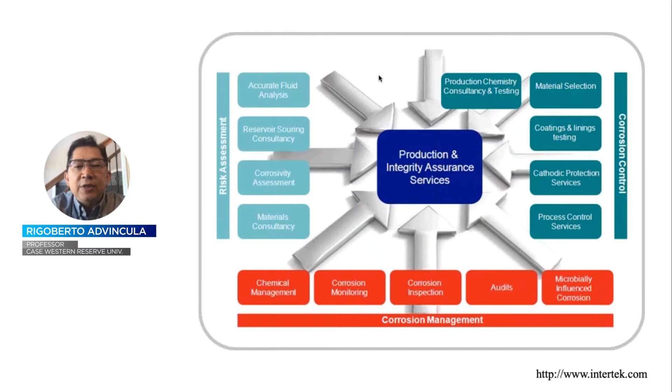Coatings go from industrial to automotive to part of the architectural coating industry, as well as different types of asset integrity management. So this is a good catch-all, which says that corrosion, for example, one of the biggest problems in any economy or industry, has to be mitigated by a number of channels, from effective management to different types of monitoring to different types of services. But more importantly, a coating scheme, technology, or project has to be part of that initial CapEx and OpEx—that means capital expenditure and operational expenditure of any industry that has to protect its assets.

Let me show you that the problem lies in environmental exposure of a lot of things, starting with carbon steel or any steel that corrodes, where you have problems either from the environment, from the fluid that's part of the process industry, or removal of waste, specifically in the oil and gas or even geothermal industry. The problem is you have to balance between the cost of capital expenditure and operational expenditure, which is part of the ownership proposition value.

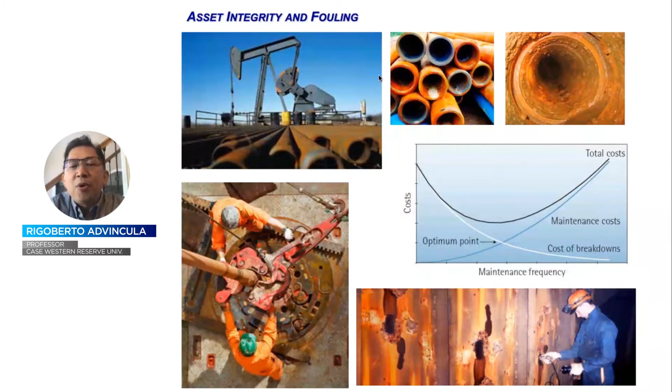So what happens is that if you try to overprotect at the beginning, if you try to use the best materials, the idea is that you will then have, not maintenance-free, but less maintenance of that asset. On the other hand, if you use cheap materials, standard or even below-standard materials, or any type of material that does not fit the environment of operation internally and externally, you will end up spending more for maintenance and replacement. So there's an optimum point that you need to balance these two needs.

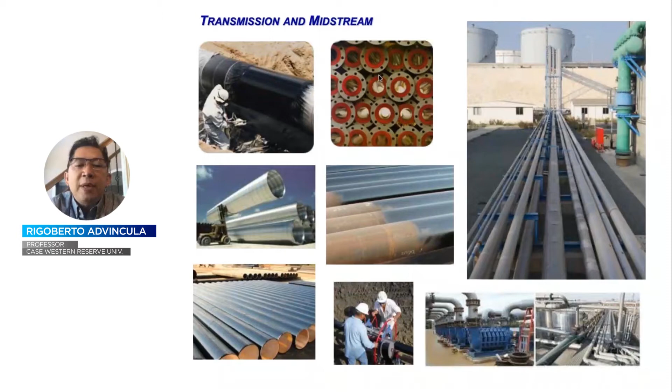For example, in the oil and gas industry, there's a lot of transport and transmission going on. We're talking about gas, distillates, or oil that has to be transported from one side to the other—for example, from the upstream production site all the way to the refinery. We are talking here about thousands and thousands of miles of pipes that are buried underground. Carbon steel, which we will review later, is of course the dominant transmission mode, and this is being replaced these days by non-metallic systems such as HDPE, or high-density polyethylene.

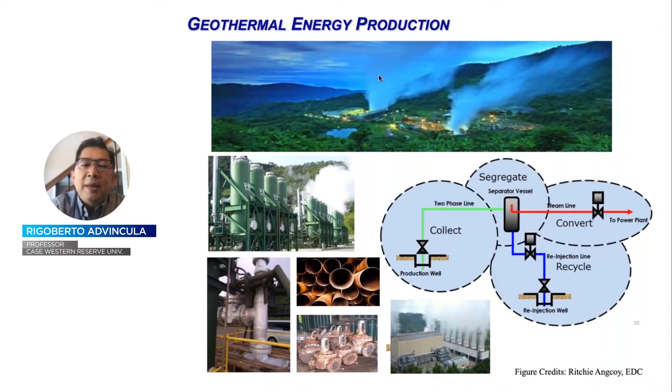Another industry with very challenging needs is geothermal energy. You have high temperature, corrosive environments, and while not so much high pressure, pressure still plays an important role in the presence of scaling and corrosion. These assets need to be protected, since they degrade much faster due to the Arrhenius law with regards to corrosion, the mineralogy, and high brine conditions, not to mention steam or high temperature two-phase fluids. So protecting them, whether using the best alloys or different types of coating methods, has to be part of the project and operation.

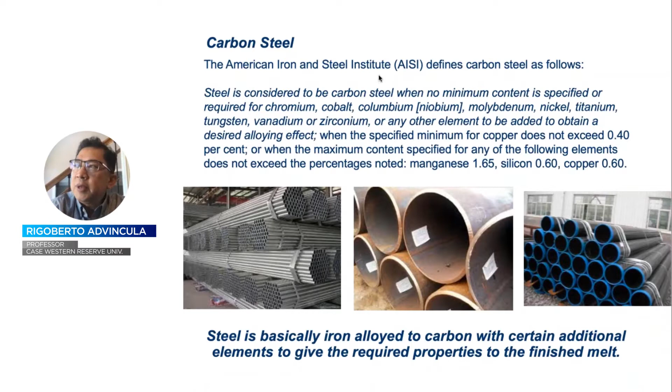I promised an overview of carbon steel. Carbon steel doesn't mean carbon is the highest content—steel is iron alloy as well, but it also has several metallic ingredients like chromium, cobalt, and molybdenum, which are alloys that give a certain amount of protection. So what is the carbon content when we say carbon steel? It has to have a minimum amount, which improves not only corrosion resistance but also some of the mechanical properties of the steel itself. Carbon is thus a very important designation and part of what we call steel pipes or the steel industry. I won't explain all the different types of steels, except that one sometimes hears about corrosion-resistant alloys.

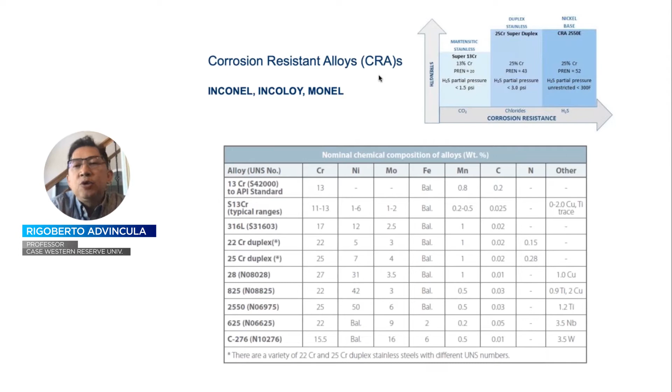Inconel, Incoloy, Monel—these are some industry trade names you may be familiar with. These alloys, super duplex, etc., need to have an amount of chromium and nickel at a specific percentage that allows them to withstand several types of corrosion, from what we call sweet and sour corrosion, meaning a differentiation between the effect of carbon dioxide, sulfur, H2S gas, etc., on the ability of these alloys to withstand corrosion. Again, this isn't a talk about alloys or different types of super strength, highly resistant, even titanium alloys—that could be another talk for today.

By the way, there's a good approximation that 5% of a country's GDP is actually spent addressing corrosion for the whole country. That means in the US alone, we're talking about hundreds of billions of dollars of resources spent towards preventing corrosion.

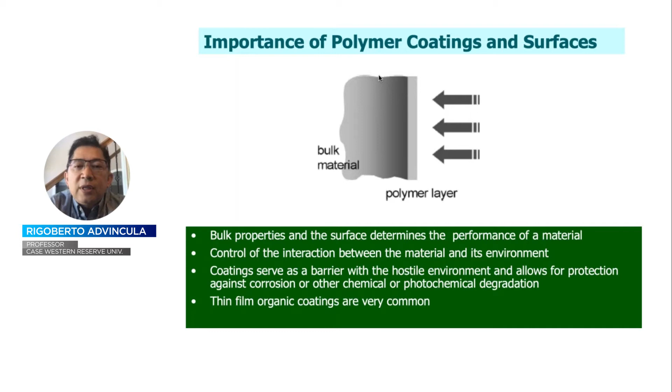So what is the importance of coatings? The best way to view it is that it's not a one-way proposition, or a coating that only responds to the environment. In many ways, a coating is controlled through diffusion, barrier properties, even smart properties that mitigate corrosion. But remember, the coating also has to adhere to the surface and also has the effect of containing or packaging what's on the other side of the coating.

So when I say coatings, I might as well be talking about automotive coatings, packaging, different types of consumer care products, or even your iPhone, because the presence of coatings enhances the lifetime or product shelf life of any consumer product, but also helps preserve assets, as I mentioned earlier, or can have implications in the healthcare industry.

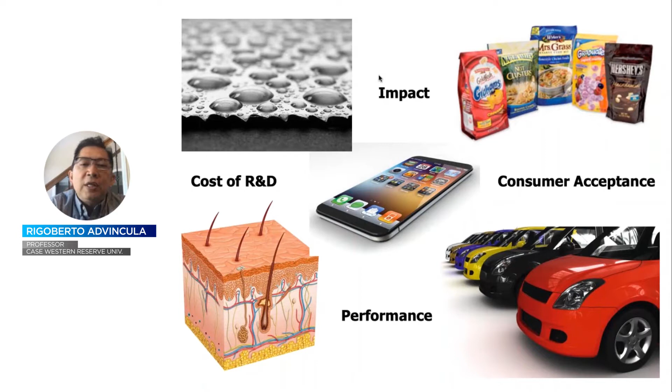In my work as a professor, we have also worked on a number of what we call ultra thin film coatings—nano structured layers or coatings that can be controlled to less than a nanometer in thickness. This can be done by chemical adsorption, physical adsorption, which divide into different types of coatings by layering, grafting of polymer brushes through chemical and polymer modification, or the adsorption of electrolytes, electrodeposition, and so on.

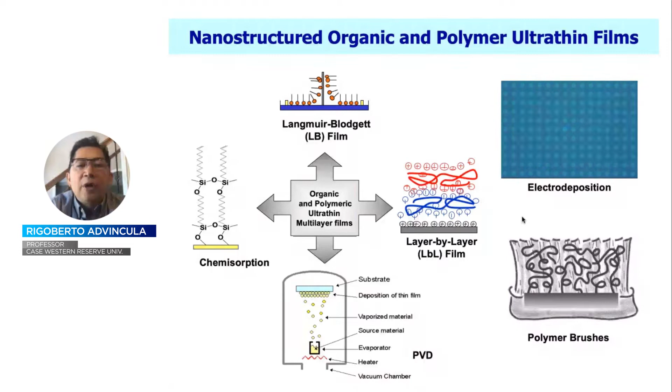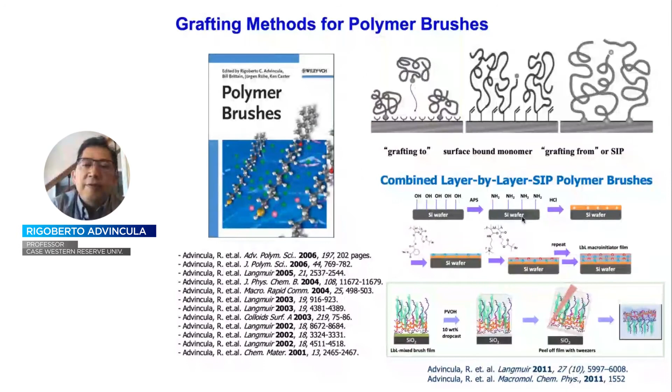In fact, we specialize in a technique called polymer grafting or polymer brushes, where we combine the chemistry of doing polymerization on surfaces, whether it's carbon steel, plastics, or silicon wafer, with the ability to control the brush density of those grafted polymers, which can have many advantages in terms of the ability to control diffusion and corrosion.

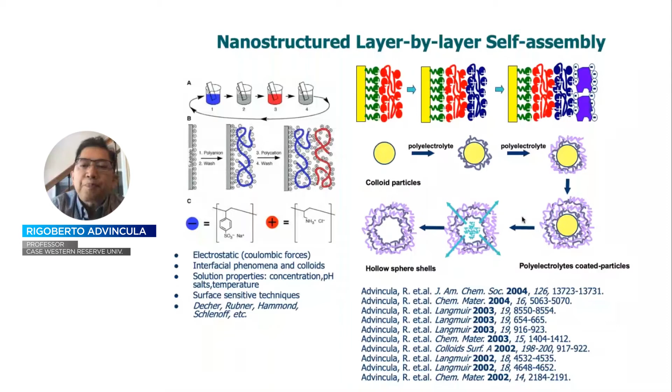Another technique that we work on in layer by layer control is the use of polyelectrolytes and different types of adsorbing species that can be nanostructured in terms of thickness, ability to diffuse or create barrier properties, as well as improvement of specific sensory response.

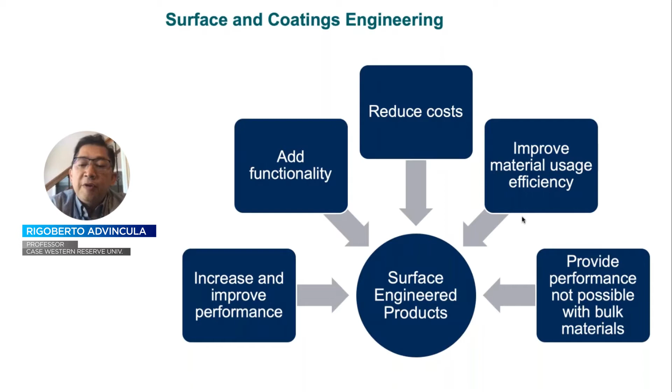So what is surface and coating engineering? Let me look at it from the point of protection. First of all, a surface engineered product is meant to improve, protect, increase performance, or reduce cost. For example, many paint companies or suppliers of protective coatings have to start from a value proposition that improves over existing products or creates new functionality. So any surface engineering project has to have a good groundwork in science and engineering knowledge, on the action of individual contents on the formulation, the ability to withstand extreme environments, or simply a durability that combines with the cost of the product itself.

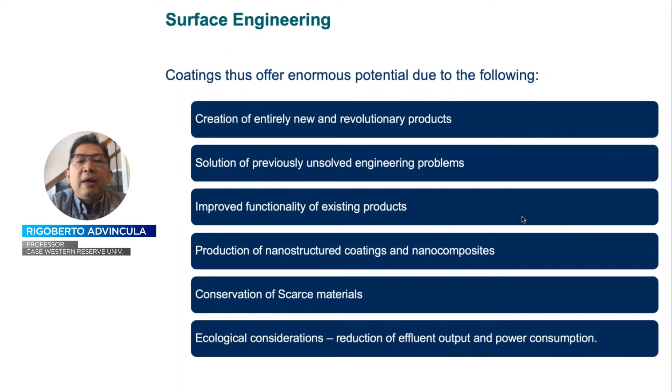So actually, many types of materials or products are basically conversion industries. That is, you take raw materials and try to improve on an existing application by combining these raw materials to have a synergistic combination or action that improves that performance.

So let me preface this by differentiating the different coatings available. When we talk about do-it-yourself paint, a $30 to $50 can you can buy from Home Depot or use in a lot of building construction, these are architectural coatings, dominated by latex paint these days, but also epoxy, polyurethane, and others. This is something easy to apply, but with less function in terms of protection.

On the other hand, industrial and light industrial coating could be self-priming epoxy or polyurethane, has a better protective ability, and at the same time can be used in bigger projects such as industrial structures, bridges, buildings, warehouses, etc.

Finishing coating has a durability of its own, but also has an aesthetic finish, and is used mostly in finishing appliances, automotive, etc. Specialty purpose coatings are based on specific function and performance.

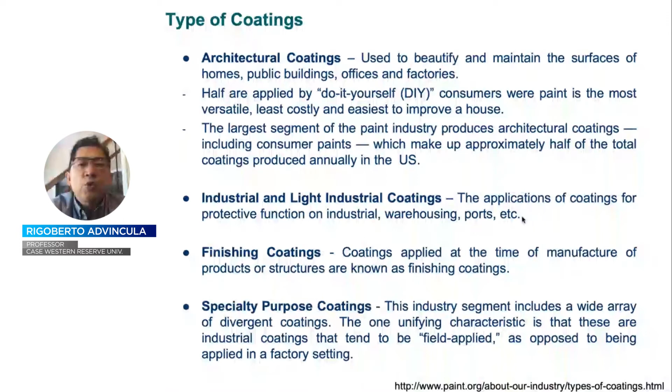Typically, these are coatings that can go into high stress environments, protecting process industries, or used for the military and Department of Defense. Special purpose coatings have high performance, sometimes less maintenance, and can be used for environments that encounter biofouling like marine, etc.

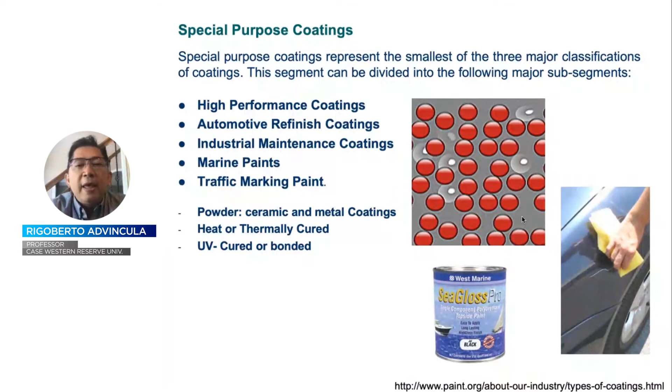And we are not just talking here about organic or polymer coatings. We could be talking about ceramic, metal coatings, hybrid coatings, or plasma deposited coatings, etc. In other words, this can be quite expensive as coatings, yet they do the job, and they're meant to be an investment in terms of performance.

For example, other types of coatings that we've worked on that might be of interest either for protective coatings or consumer products is the type of ultra thin and what I call unconventional coating. A lot of this has been making way towards improving other types of formulation. A good example would be coatings on your smartphone.

So each one of us has a smartphone. If you ever wondered why you have smartphones that last, or are smudge free, or of high performance, these are very, very thin coatings, typically by a curing method or plasma deposited method, meant to combine transparency, electromagnetic shielding, for example, and the ability to not retain or even oxidize sweat or typical organic waste or dust.

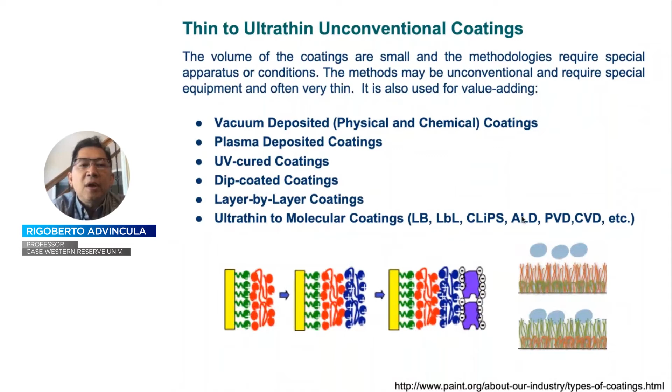So I'm not going to go in this direction for today. I could give a very specific talk on unconventional coatings, but I'd like to focus more on industrial coatings and protective coatings that are used in a lot of asset preservation, asset integrity, and process industry.

So what is a basic coating procedure? Well, you have to start with the coating composition, or maybe even synthesize all the way back to that monomer or polymer that will give a better performance over existing series or family of binder materials.

And then you need to consider the transport mode, meaning how do you take the paint from a can and deliver it to a wall? Well, you have to use a brush or a roller - that's a simple transport mode. Or if you cannot, you can use a spray method, or sometimes some specialty coatings use a high vacuum.

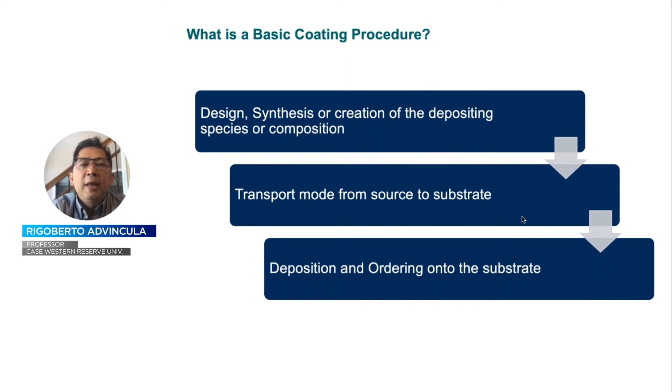And then a substrate by which you need to deposit or order this film or control its thickness. We're talking here earlier about carbon steel, but we might as well be talking about plastic or 3D printed parts or different types of surfaces that need good adhesion. So this is your basic coating procedure consideration.

Once you have that coating technology, a majority of the coating methods out there is actually delivered as a liquid material, whether it's a liquid droplet or a paint can. That means viscosity, or here I will use the term rheology, the science of flow, needs to be considered. There are many things to consider in terms of the ability to retain that viscosity over time or various surfaces, or the curing behavior.

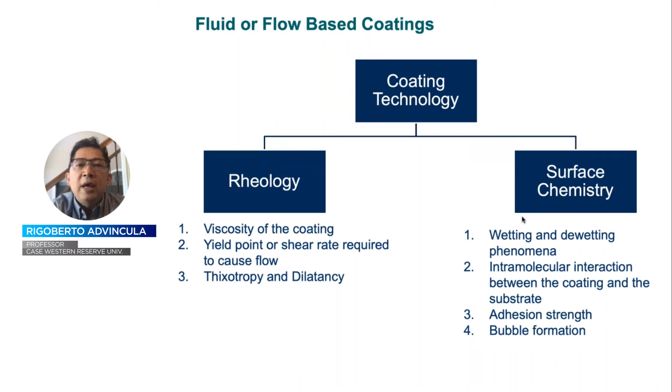On the other hand, the surface of the substrate itself needs to be considered. Is this a surface that can be wet or de-wetted, has de-wetting problems? Can you achieve chemical or physical adhesion? Or you can mitigate things that prevented you from getting a good aesthetic or architectural finish.

So as you can see here, the delivery of a liquid material as a coating has a time limit. Over time, as the coating material dries or the solvent evaporates or you have a curing behavior, the viscosity increases. That means you only have a limited window between your application to work out a good spread or finish.

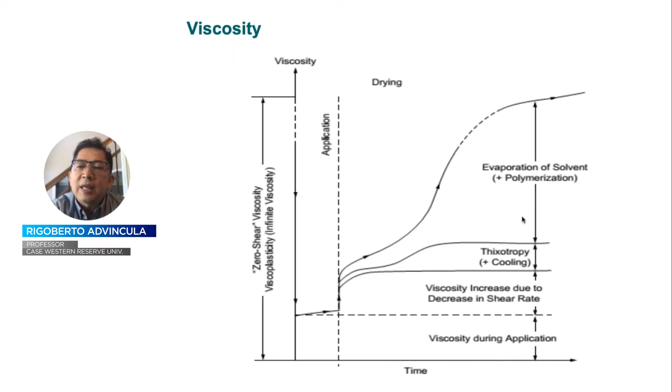This is something that's more practical and is actually quite an important undertaking in product development, because if you have poor viscoelastic control, it can have problems in the field, or you can have problems, or simply products that cannot be accepted by the market.

Anyway, this viscosity or rheological condition actually has many types of consideration when it comes to the surface. Do the binder particles or droplets coalesce over time? Do we get good wetting behavior on the surface? Is this a self-leveling material? Are there any considerations in terms of edge effects, depression, or sagging behavior?

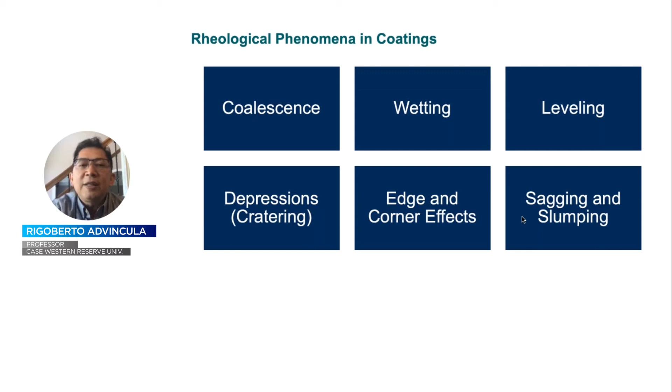So this might sound very practical in industrial terms, yet I guarantee you, if you go to Home Depot, as much as I do, and I have to fix things, I am very particular with the performance of coating products. You can actually be assured that even before it reaches Home Depot, a lot of science and engineering has gone on. So for those of you who like to do it yourself or DIY your projects, these are things to consider when getting the best paint versus cheap paint.

So let me use the rest of our time now to look at the major protective paints and coating materials. So I started by mentioning

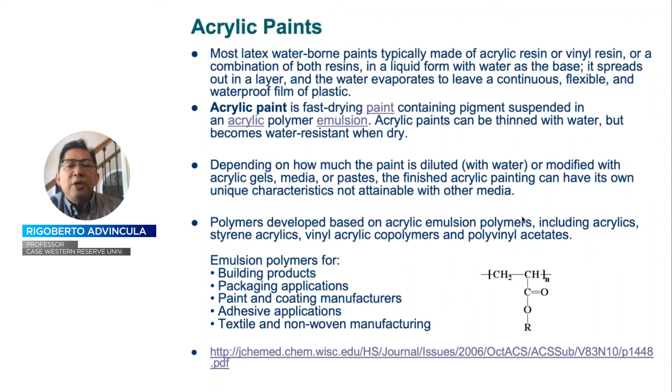architectural paints, where a majority of the architectural paints are sometimes called acrylic paints or latex waterborne paints. It's because the latex particles, which are classified as your binder materials, are made from a type of polymerization called emulsion polymerization. The monomers used are based on acrylates or methacrylates, meaning polymethyl methacrylate, butyl acrylate, or styrene, etc., that are produced by emulsion polymerization forming what we call latex particles. Here is just a picture of some of the monomers that could have gone into this binder material. A lot of these days, acrylate dispersions are combined with different types of formulated chemistries that can harbor epoxy, polyurethane, and other types of curing behavior.

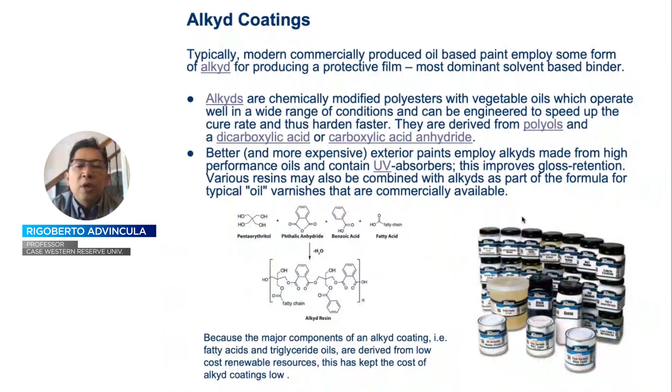Now, in the past, we heard about alkyd coatings. For the most part, this even goes all the way to ancient history. These are paints based on oils or various types of performance oil or finishing for wood, etc. An alkyd resin essentially involves a curing chemistry that is sometimes confused with varnishing, which is a good art practice or type of finishing for hundreds of years. But at any rate, these types of materials are typically solvent-borne, meaning they involve the use of organic solvents to deliver and give the coating consistency.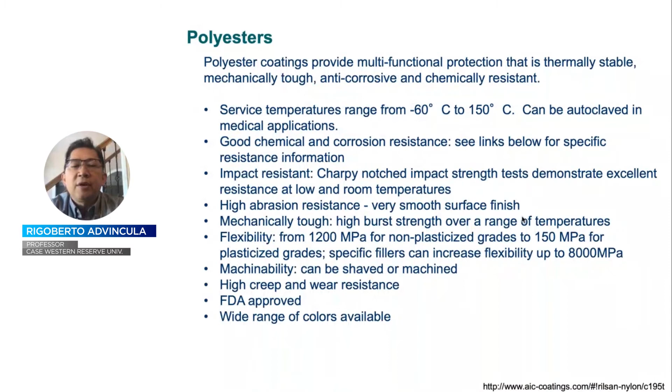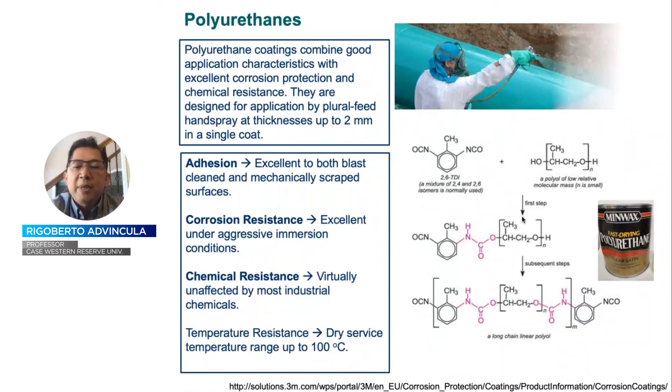Polyurethanes probably is more familiar to some of you who deal with industrial coatings or protective coatings that deliver higher performance. Polyester, for example, you normally encounter in automotive finishings or even can coatings. Polyurethane, on the other hand, is excellent for industrial grade performance, usually bound by either a cross-linking curing mechanism, or polyurethane particles or parts of the dispersion combined with other chemistry. So polyurethane is a very popular material as well.

Something that combines protective properties as well as cost in a lot of applications involving carbon steel protection is epoxy. Epoxy is found in a lot of adhesive materials as well. But when we say coatings and adhesives, the chemistry is not far from each other.

Epoxy involves the oxirane or epoxy group, typically synthesized by reacting bisphenol A and epichlorohydrin. Once you have the epoxy group, this can be cross-linked with, let's say, diamine or what we call co-reactant or hardener, giving you a very good thermoset coating based on a cross-linking mechanism. There are many types of epoxy variants with different hardening materials. The bottom line is epoxy not only belongs to a large family of coatings, but is also very popular in the carbon composite or fiber composite industries.

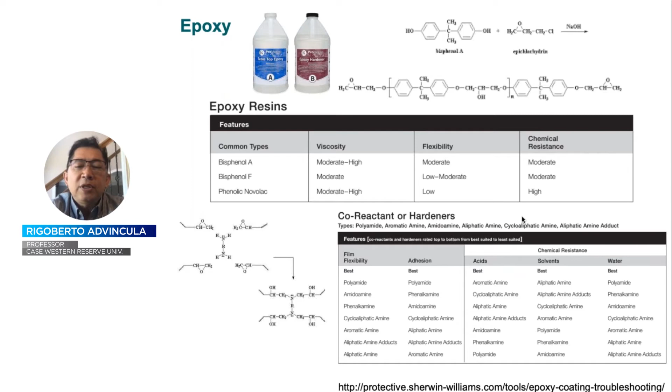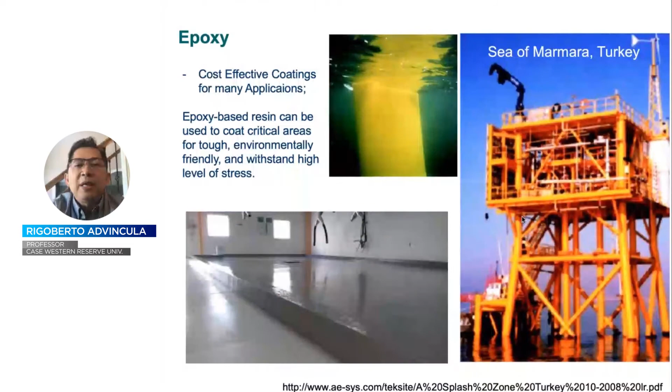So if one were to choose right now a coating material with good performance, cost, and overall acceptance to the market, epoxy dominates most of this. For example, if you just paint your garage, typically that could be a self-prime epoxy coating, or it's used in a lot of marine environments, especially for oil and gas assets. Epoxy does the job very well.

Silicone, elastomeric coatings, and adhesives are very well known for durability, for non-wetting, and for good chemical resistance. The coatings based on silicone are typically elastomeric, meaning you can rely on them even at sub-zero service temperatures, for example.

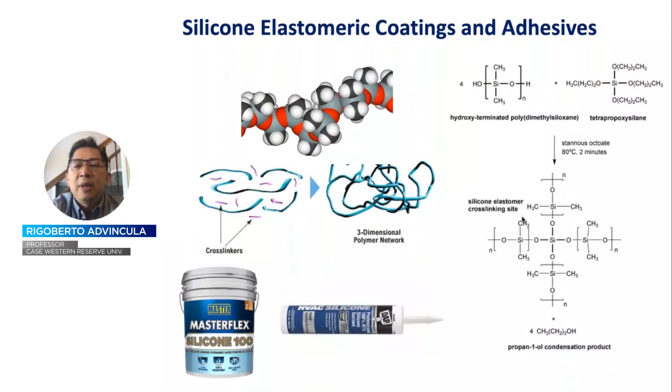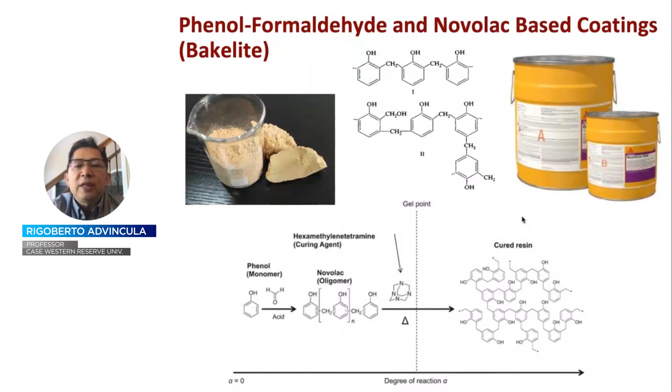Phenol formaldehyde and Novolac-based resins, probably together with epoxy, constitute some of the more cost-effective methods as well, and this is very old chemistry. In fact, if you've heard of the term bakelite, this is basically phenol formaldehyde chemistry that results in very durable thermoset materials or conditions for coating.

But really, you cannot exhaust the list available in the market. Epoxy, phenolic, phenol formaldehyde, polyurethane, hybrid coatings, ceramic-containing epoxy, inorganic zinc, Teflon coatings or different types of dispersions of Teflon, copolymers of fluorine, and highly protective coatings based on high performance polymers like PPS, etc. All of this constitutes some of what we know as protective coatings based on polymer and hybrid dispersion.

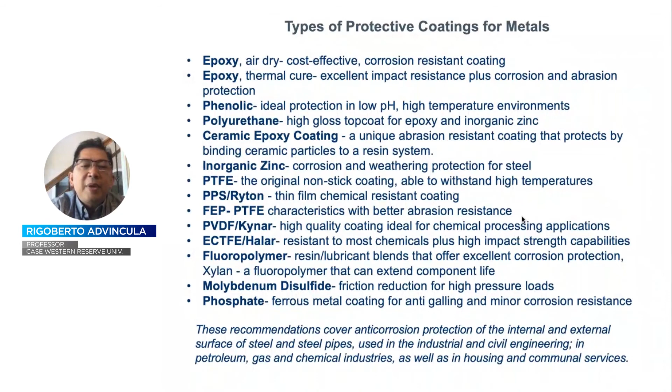Now, of course, we will not go into detail at this point on metal coatings or galvanization. I'll mention them briefly, but if we do not mention them as part of the protective coating selection, we will be amiss. For example, the use of high-performance alloys, or plasma arc weld deposited materials or metals, or arc plasma spray—these are different methods of delivering metal materials as coating.

Here you can see different types of coatings that are applied in the field. You can classify the application of coatings as external, internal, or factory versus field. A lot of them can be used for repair, mitigation, or as part of typical fabric maintenance on surface assets. But in general, one has to deal with protection in a changing environment, or a specific application beyond that of the factory-installed coating.

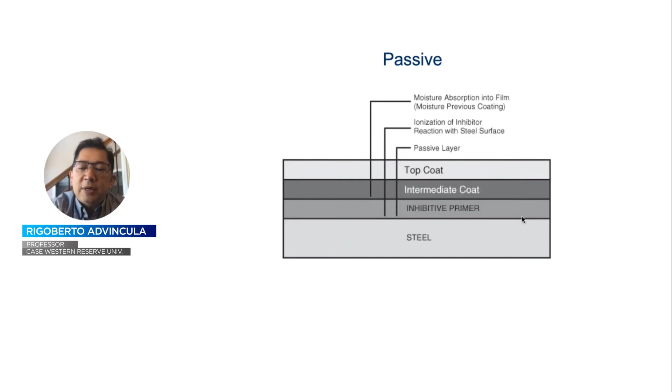So here, if we classify what would be considered a passive coating, first we can classify them as substrate, and on top of the substrate you put a primer for good adhesion of the intermediate or protective coating, and then finally a top coat that provides an extra barrier or finish. So passive can be what you'd call a three-layer material as well.

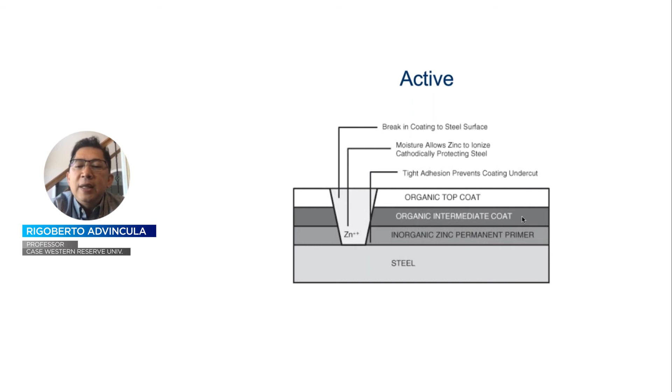An active coating, such as galvanized zinc or other types of self-healing coatings, means that damage that sometimes occurs on the surface will be mitigated by converting, let's say, zinc to zinc oxide, or through other corrosion additives that tend to heal the thermomechanical damage on a surface. So one can say that a coating system is actually, for the majority, a multiple coat system.

On the other hand, a single coat system could be a proposition for decreasing the cost. But in general, a typical coating project should involve a minimum of about 50% surface preparation. Why am I emphasizing this? Well, surface preparation is probably one of the biggest sources of failure in any coating job. If you don't prepare the surface very well, over time the coating will delaminate or degrade, and you'll have to redo everything again.

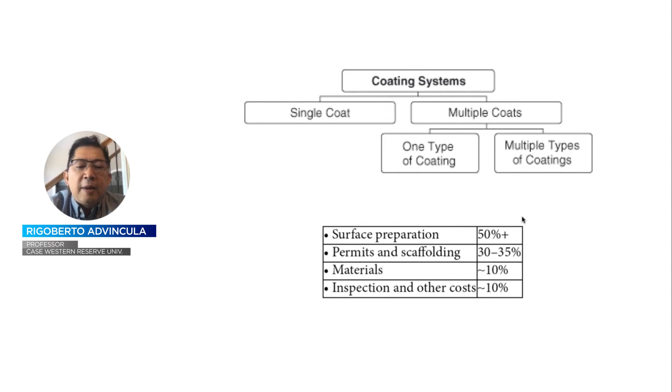On the other hand, a very careful surface preparation, whether it's DIY or contractor driven, produces lasting coating projects.

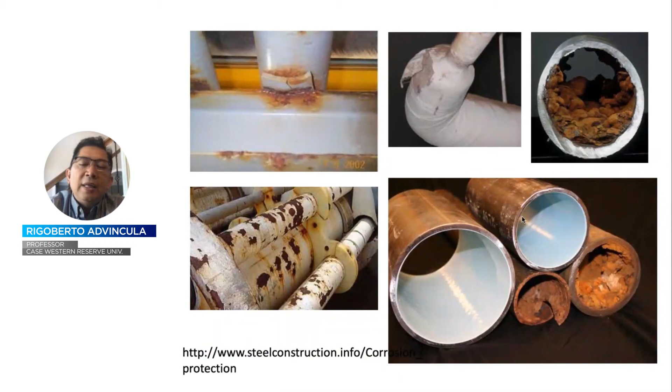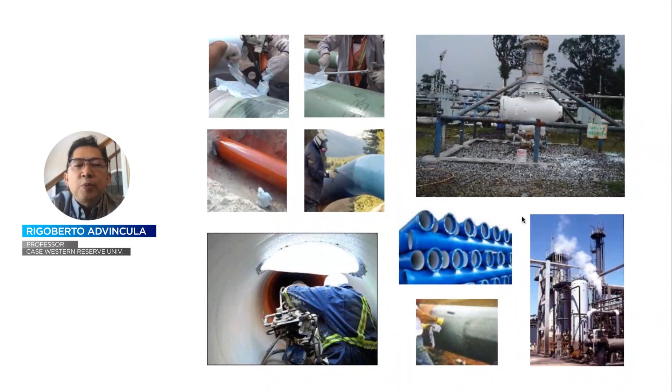Again, you can see here a variety of coating procedures and how they can be used in the field. These may not necessarily be failures of poor coating procedures, but for example, to mitigate based on the operating environment or procedure, sometimes you have to reline them or mitigate them by mechanical cleanup or coating once the product has been installed. The various industries, from geothermal to oil and gas transport, etc., have different requirements.

So let me give a very short mention here of galvanization. Galvanization essentially is the addition of a sacrificial metal, such as zinc, that is first oxidized before steel. You may be familiar with this type of finish.

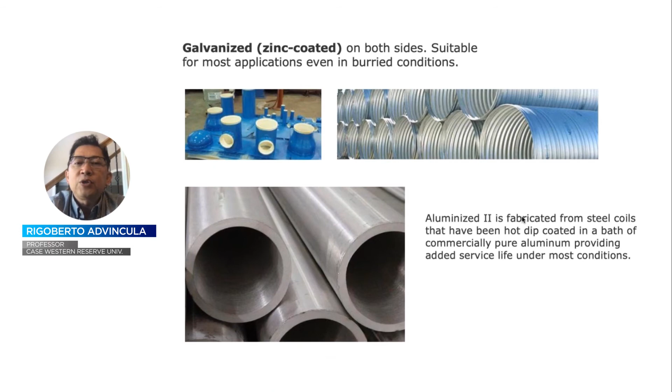Yet galvanization is a very important process—galvanization, aluminization, or other types of protective metal coatings on carbon steel, which is very environmentally important. That is, rain or shine, or in the absence of polymer coatings, this sacrificial layer or sacrificial material oxidizes to give you another coating based on an oxide—aluminum oxide or metal oxide deposition—provides that extra layer of protection so that the corrodant does not penetrate the carbon steel, for example.

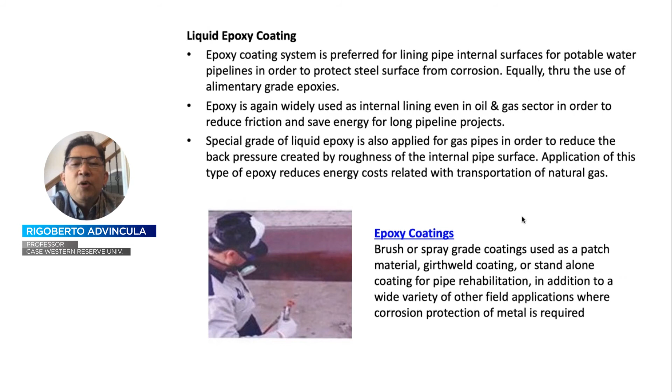You might have heard of fusion bonded epoxy, or liquid epoxy coating, or some type of coatings that can be prepared as a dispersion and then heated or cured in the factory. Epoxy coatings, of course, can be applied in the field, but the use of epoxy as part of the factory-installed coating is quite predominant. I'll show you some FBE projects in a few slides. But suffice it to say, other than FBEs, cement lining, asphalt lining, polyurethane coating—these are different types of coating applications that can be factory installed.

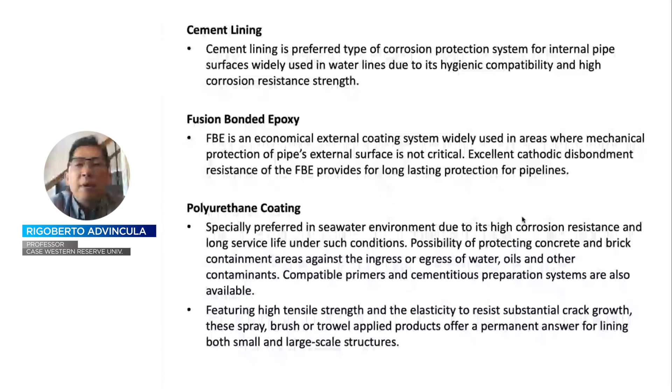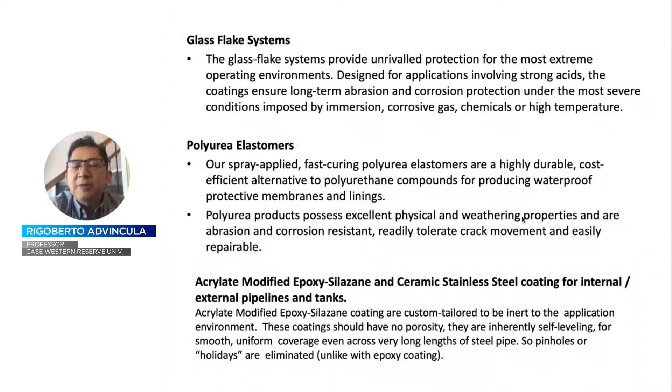Better yet, in order to improve the mitigation of corrosion on a material, you have polyurea, elastomers, glass flake systems, hybrid materials, different types of acrylate-modified epoxy, and ceramic-containing materials, etc. So the list here can be quite exhaustive of what is available in the market. Again, a lot of these are converted materials, meaning from the raw materials or choice of a polymer, binder, or majority component in a formulation. Each of the additives, which can be as much as 20 additives, is meant to improve the performance of the coating over time.

So as I mentioned, a lot of factory-installed, pre-coated polymer systems come with pipes such that they can be specified, they can be tested, and they're expected to do the job.

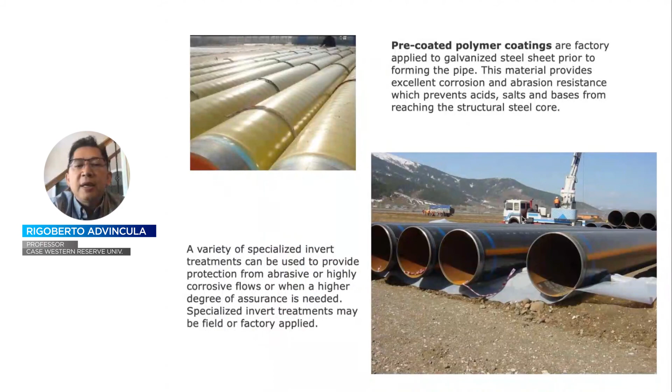So for example, here you can see how FBEs can be prepared on a steel pipe. Essentially, the FBE is applied with the heat or heated pipe. The FBEs are epoxy cured coatings. So you have epoxy, and the heat together with the hardener that is introduced results in a very durable coating that can even be applied in the interior of a carbon steel, meaning FBEs can actually be used to mitigate corrosion inside the pipe, or the insertion of liners or pipe within a pipe is sometimes employed to give higher durability against corrosion.

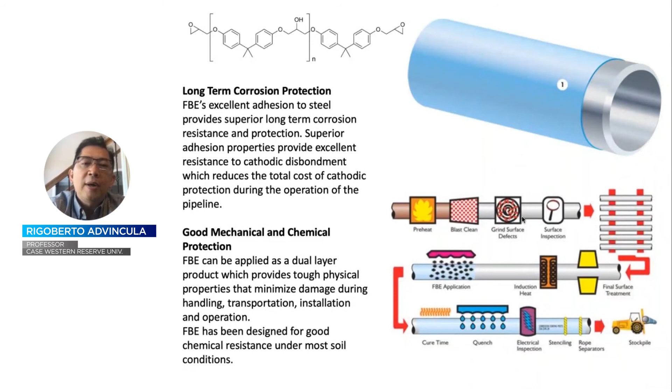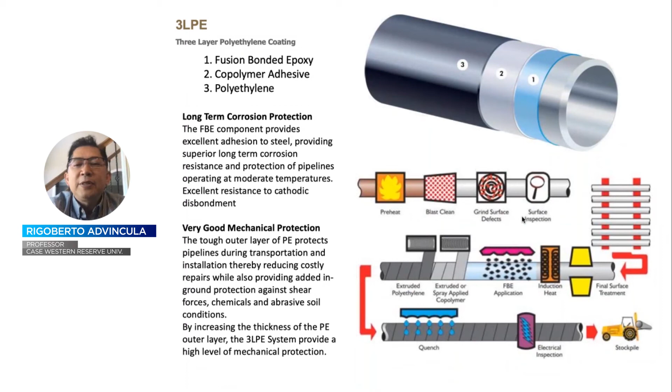For example, other types of polyethylene and outer protection coatings, other than the pipe itself, can be used to expand the durability of these pipes in the field. So, for example, one can do away with carbon steel itself by using non-metallic materials, or HDPE itself can be the pipe. So, in other words, you have a lot of choices for protective coatings during application.

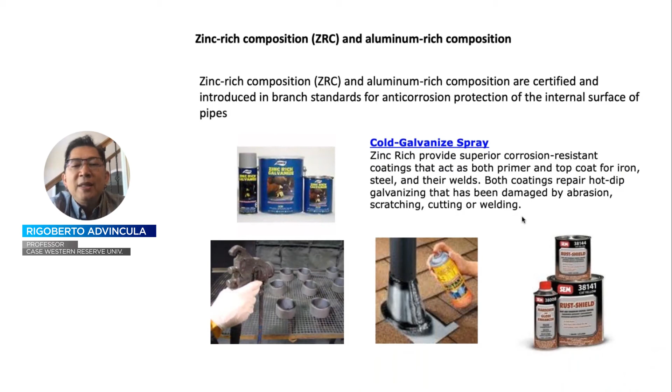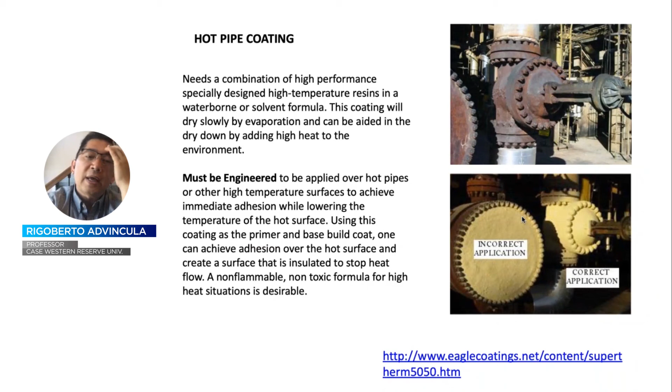Now you're familiar with galvanization. So can you apply or do a DIY with zinc-rich composition? Yes, you can. Zinc and aluminum-rich composition can come in the form of paint, spray paint, or deposited by heat as particles or dispersion. Pipe coatings, for example, also have insulation properties, and I encounter a lot of these products or projects in the geothermal industry, and a lot of them are built to withstand higher temperature.

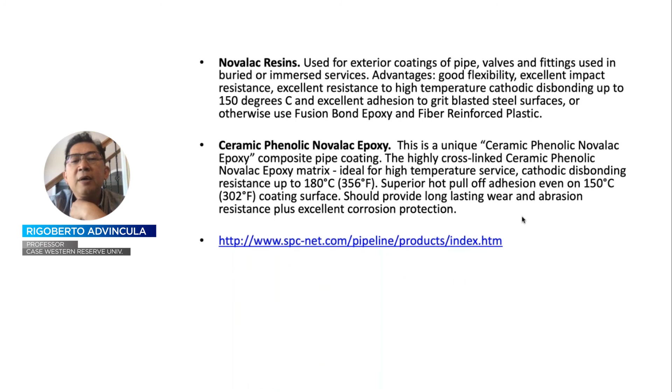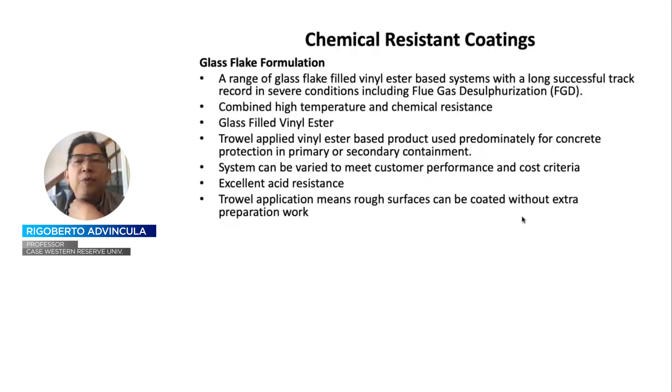They range from Novalac to epoxy or Novalac epoxy compositions, and therefore including ceramic materials. They can withstand very high temperatures, but sometimes lack chemical durability. Again, the list can be exhaustive, so I'll skip some of this. Glass flake formulation, for example, can help improve some of the thermomechanical properties and resistance to wear.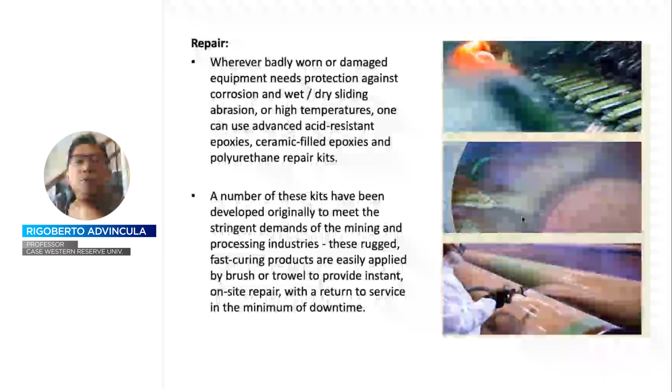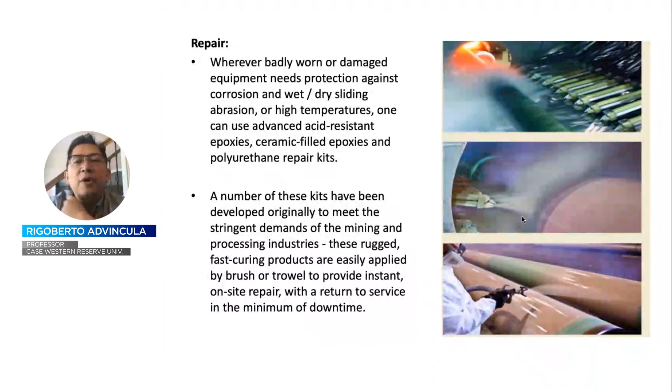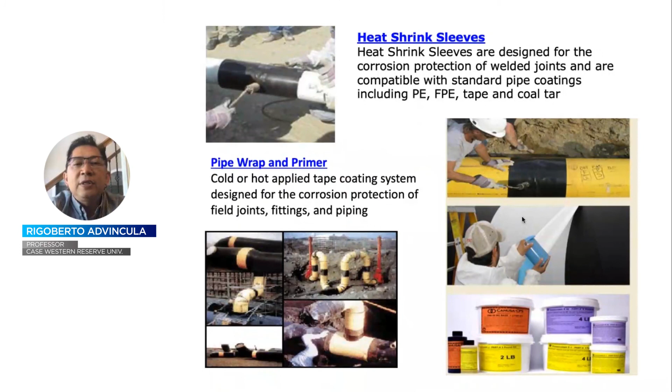Let me skip this and go towards repair. One thing the paint industry has to counter is providing products that can be used for repair, or once damage has been done, applying a repair kit or reapplying a coating in the field. There are many companies that have specialized products, especially for pipes, buried pipes, and even marine applications. You can use heat shrink sleeves, thermoplastic coatings, or different types of wrapping materials to repair leaks, prevent future leaks, or mitigate the possibility of a leak. I've encountered a lot of this in both the oil and gas and geothermal industries.

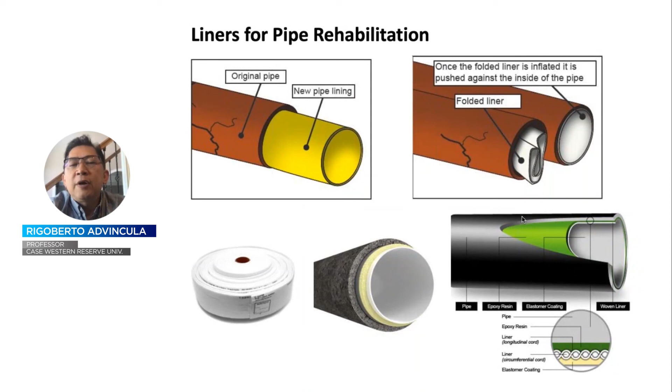Liners, on the other hand, although strictly one can say this is not a coating yet as a method, this is gaining popularity, especially for municipal sewage and water pipes, because liners are essentially polymer materials or fabrics that can be inserted into existing carbon steel pipes, pressurized, and expanded, so the shape is already determined by the corroding pipe. But the liner provides a fresh surface, or coating if you still want to use that term, for the fluid to flow. So there are a lot of contractors, formulators, and developers for this type of mitigation.

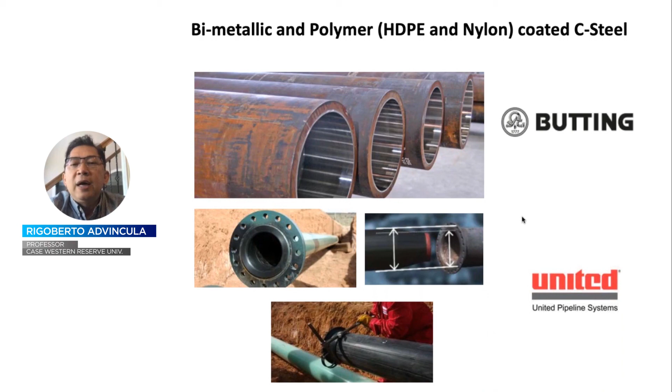And then finally, again with metals, one can insert liners or coat them with fuse bonded epoxy or alloys. The reason one can use liners or bimetallic pipes of two diameters is that by inserting another pipe, you take advantage of the mechanical support provided by carbon steel, and then have corrosion protection based on a thicker diameter inserted pipe or liner that handles the fluid going through it. So while not strictly an applied coating material, liners, pipe within a pipe propositions, or the insertion of different types of preformed materials that mitigate chemical or corrosion attack is actually part of the coatings industry.

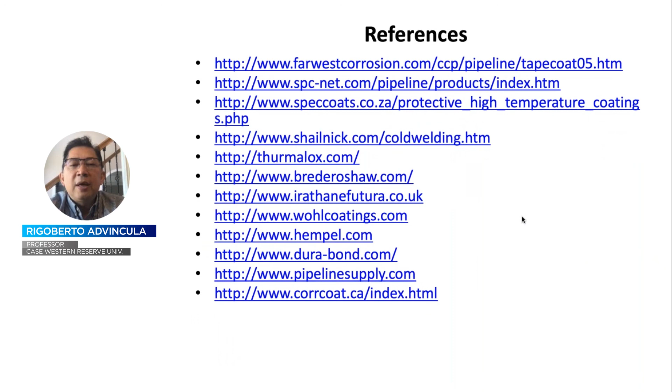So with that, I hope I've had the opportunity to give you a very good overview of the coating industry. Again, I hope this is very useful to you, and I'd like to thank Park Systems, developer of some of the best AFM products out there to use.